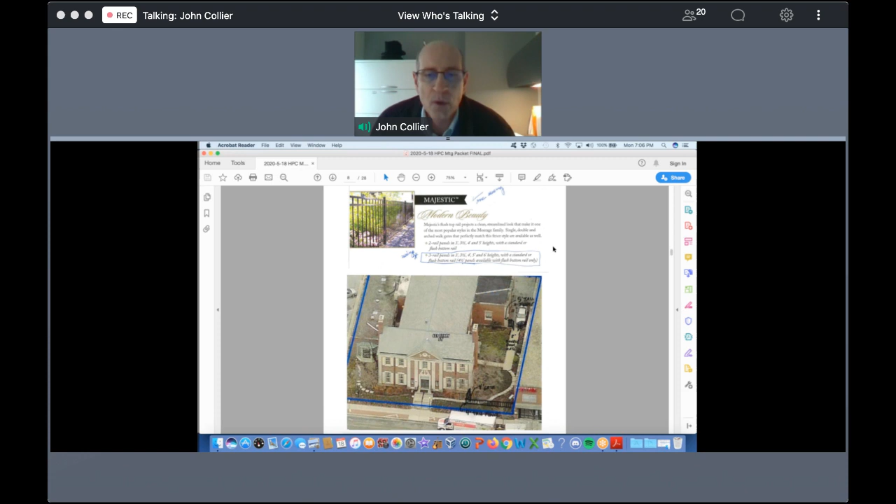And then Andy, if you can scroll down. That's just a street view. And that is it. They're having issues with people cutting through the green space, and it's causing a lot of maintenance problems, so Duncan Hall would like to address this issue. I should mention that the fences do not touch either building. They stop just shy of it.

Thank you, John. I will add that the commission has approved similar types of fences in the past. The color will be black as shown. And the COA committee recommended approval.

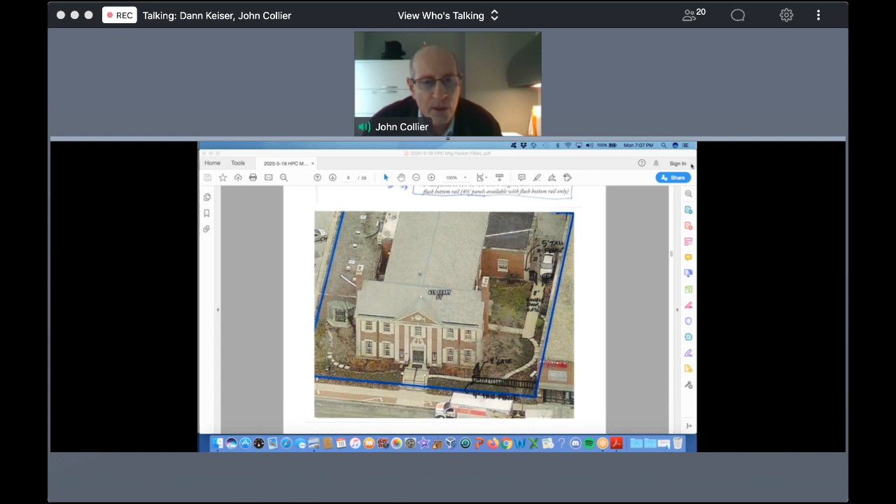Is Dan with us? I'm not sure, are you with us? Yes, I'm here. Okay, can you report on the Ferry Street fence? Yes, I'm here. Again, the black iron look is appropriate and meets the standards. It's appropriate for the district in that it doesn't touch the buildings, it's removable, and doesn't damage the historic fabric. So I think that meets the standards.

Great, thank you. Is there any other discussion amongst the commission members?

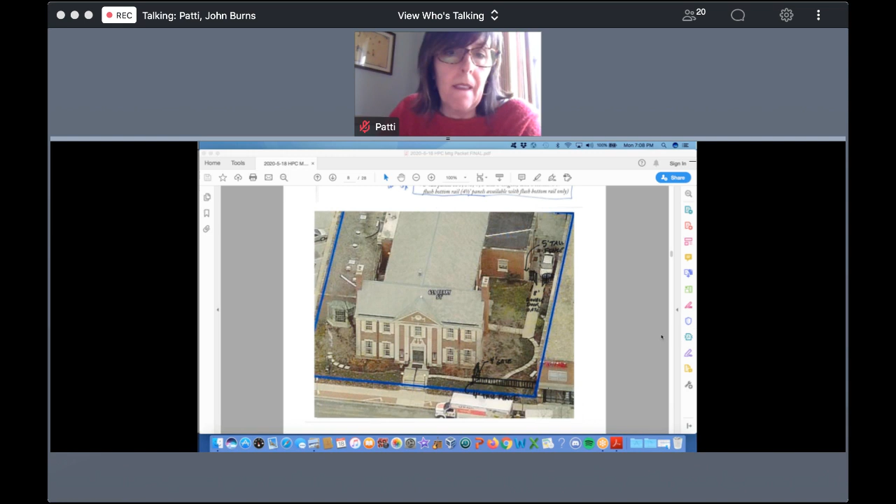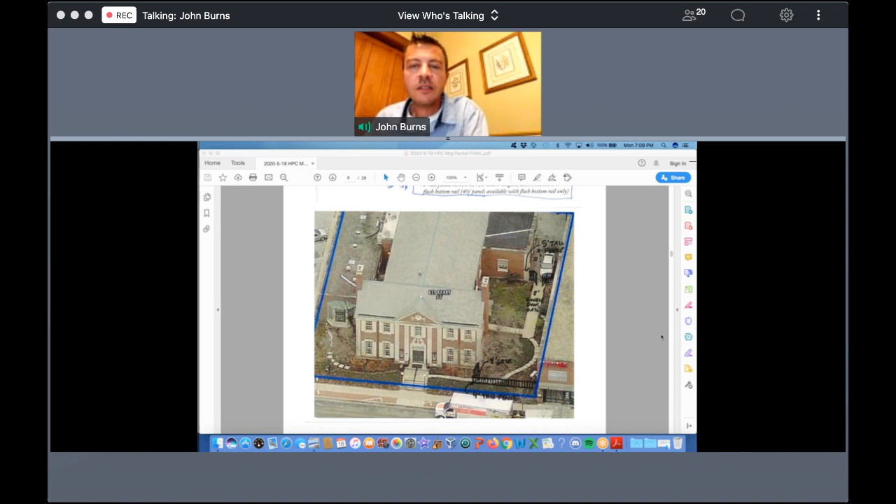And Kurt, if you would like to take us into the second report you have. Okay, this is for 631 Main Street, and it's quite a large project, and I would think at this moment, before I continue with my report, Barry, are you there? Yes, I am. Would you like to give an overview of the project?

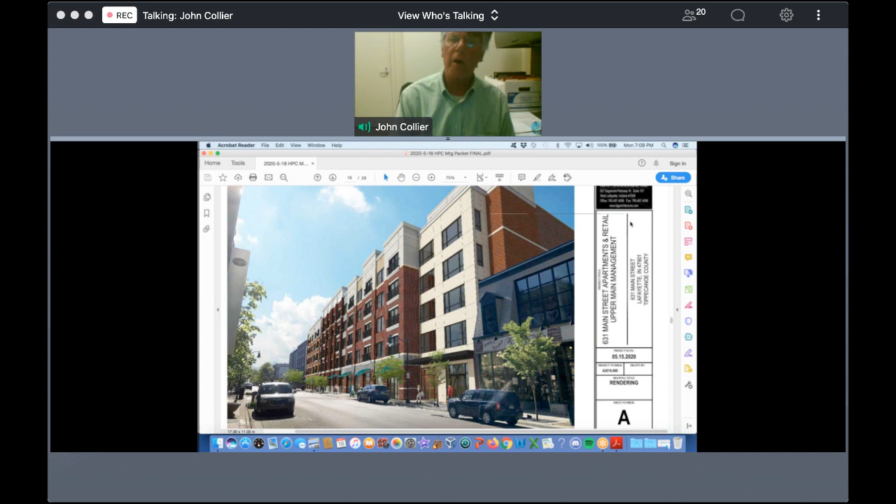Yes, hi, I'm Barry Knechtel with KJG Architects. I am the applicant for our client. And Andy, can you give Barry control if you didn't already? All right, I have pulled up the application. Does everybody see it? Yes. Okay. Yes. Yes. Wonderful.

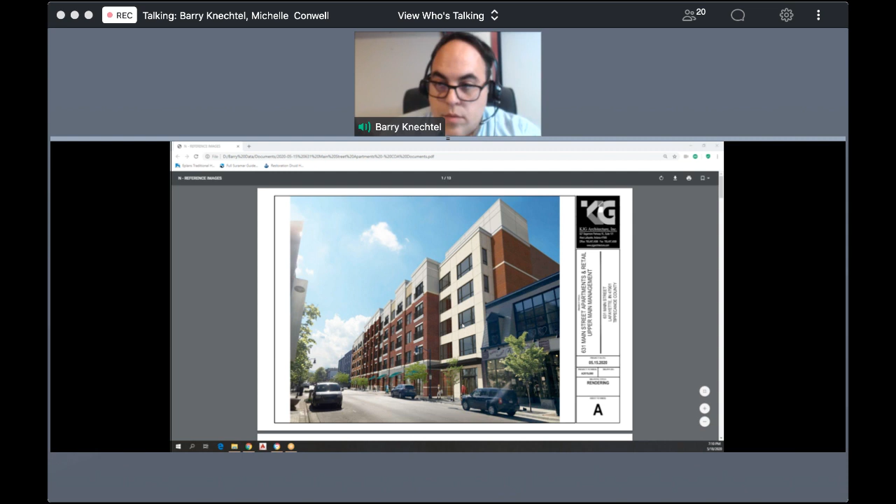The project is a 5-story infill development that will take up the former parking lot between the Frontier Building and Kathy's Candies. The first floor will be a resident entrance and leasable commercial space. Floors 2 through 5 are described as luxury apartments—large units, much larger than you'd find on the other side of the river, geared towards young professionals, people downsizing.

People that want to live in a vibrant downtown community. On the screen you'll see the view from the Lafayette Theater looking across the street at the proposed building. The entrance for residents would be on the west end of the building, with retail continuing east. Then the view from the other end of Main Street looking back downtown, you can see the courthouse in the background and the Frontier building adjacent.

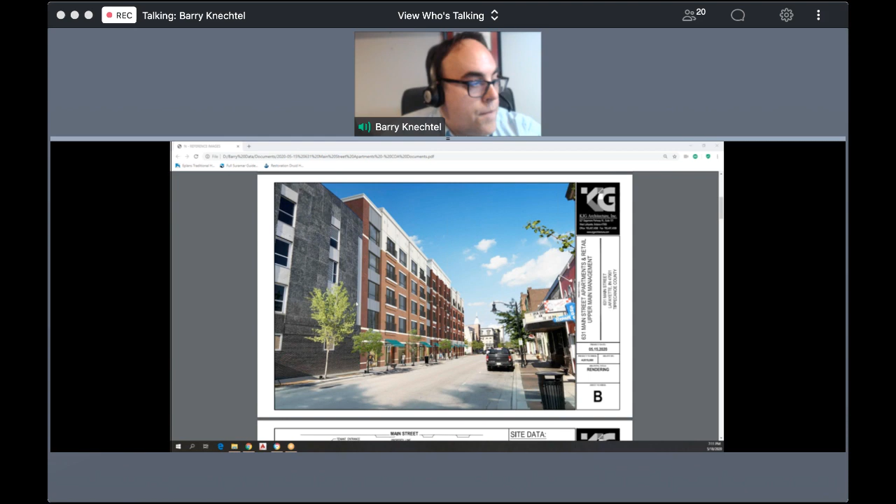On sheet C, this is just a site plan showing the building, how it fronts along Main Street. All of the utilities, parking, and access to the subgrade parking are off of the alley that comes from Columbia Street. We've designed to keep access to the Long Center for the Performing Arts and the rear access to Kathy's Candies. The curved ramp leads into the basement, and then there's on-grade parking.

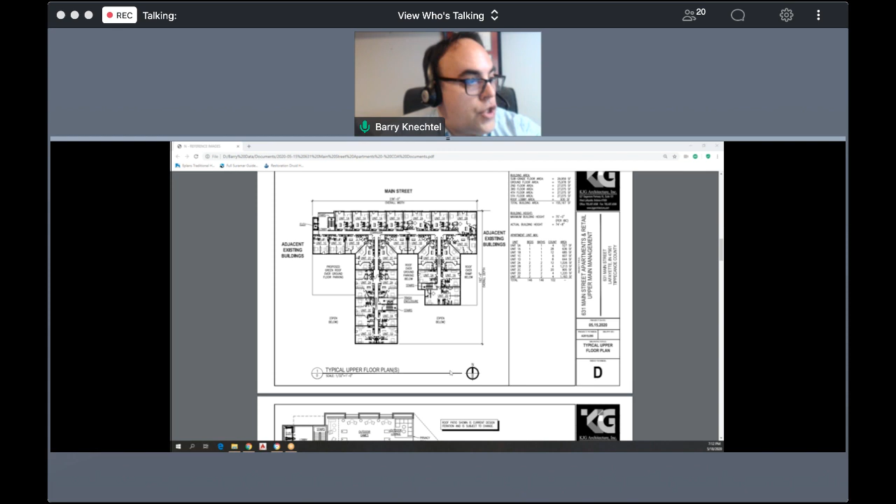Hey Barry, sheet D. Yes. Barry, will you clarify that there's a whole level of parking under that we don't see? Yes, so the curved ramp leads to the subgrade parking, which is a big rectangular box that fills a majority of the site. And I don't think we included that, Andrew, did we?

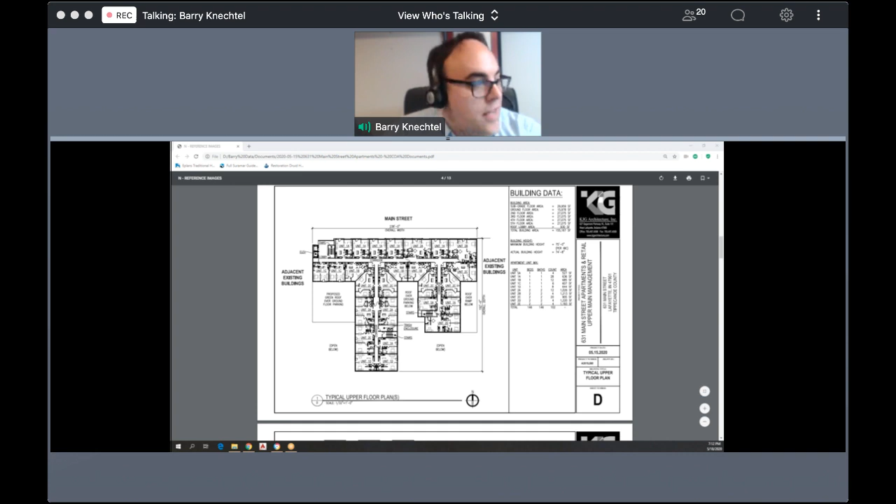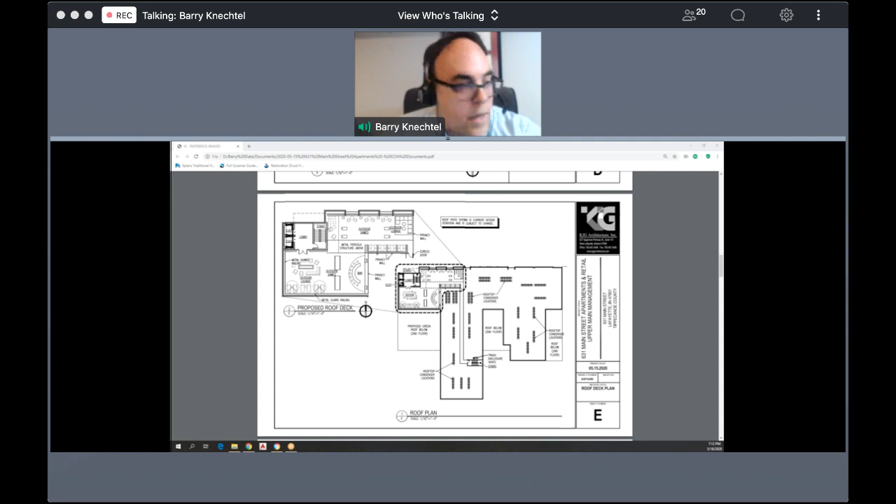Sheet D, this is a typical upper floor layout—it'll show the different apartment configurations. Sheet E highlights the roof patio, so residents will have access to the rooftop where there will be a lounge, some cornhole, and seating for use by the residents. But it didn't show up on the rendering since it's up on the roof. Okay.

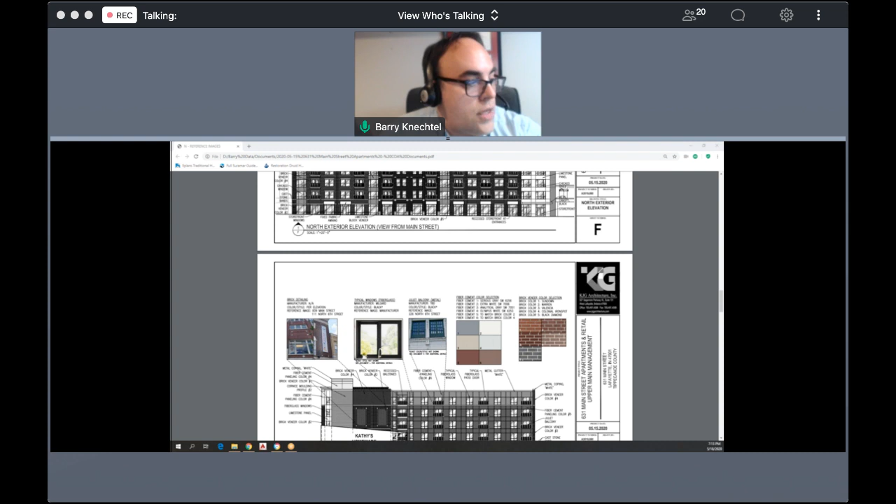Sheet F, there we go. This is the main elevation along Main Street, the north elevation. The goal of the design, instead of it being one large building that took up the whole block, was to subdivide it into some separate, more historic scale buildings.

So the resident entrance has a limestone veneer paneled system. Then we have a combination of masonry and limestone, and at the very top, we use fiber cement panels to mimic stucco or wood paneling. The fiber cement paneling is more durable than wood—it doesn't burn or rot. It's a product more commonly used now instead of wood because of its durability, used sparingly along the top. So this is limestone, but the fiber cement would just be up here.

We've shown some pictures on this sheet of other projects or buildings along Main Street where some of the inspiration was drawn from. You can see the cloth awnings we will use along the ground level. We also have multiple window types—above here is what's commonly called a Chicago style window, found along Main Street, and some double hung windows mimicking the Lafayette Brewing Company across the street. We're also using aluminum storefront, but in a black color to be more historically appropriate.

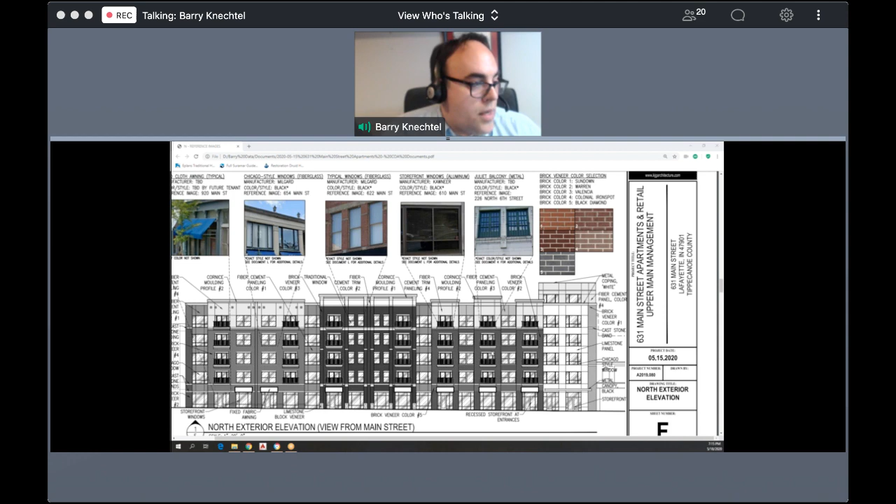Along Main Street we do have Juliet balconies, which can be found downtown, so they do not project out over the right of way. If I zoom in you can see a little more clearly how that would look—there's some lines. Barry, you said North Street, you mean Main Street? Sorry, just want to clarify. Yes, the north elevation along Main Street. Thank you. And some limestone or cast stone detailing at the sill, similar to this building that you can see here on Ferry.

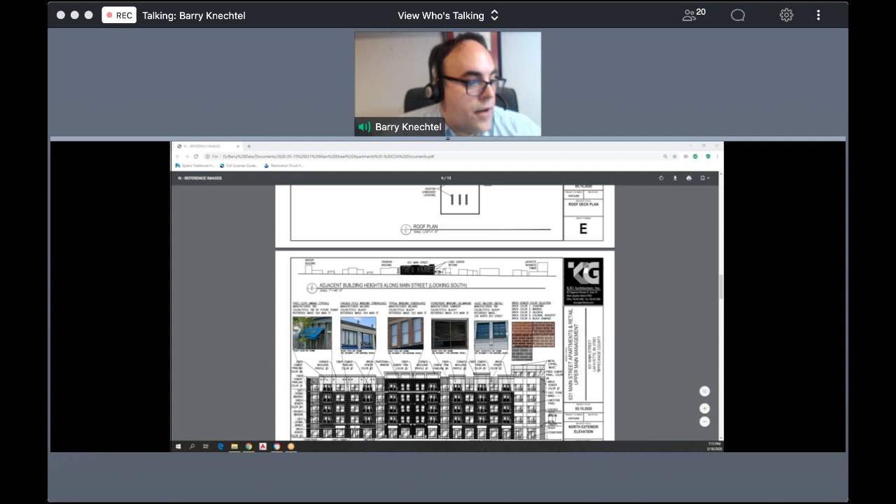There are 5 different brick colors being proposed, and that was done again to give the look of smaller individual buildings. They work harmoniously together, and we tried to stay, for the most part, in the red or brown colorings.

We've picked up some brick detailing that is used at 839 Main Street and at the Long Center as a typical detail. But then the majority of the west elevation that will not be seen very easily from any public road would be fiber cement paneling.

We did choose 2 warm red colors for the back so that when you see it, it would blend into the masonry buildings around it. And the goal of that is just to not call attention to the large facade there.

Some other notes, we did pick the Juliet balconies. The owner does want slider glass doors, but we've selected a French door style, meaning the stiles and the rails are much thicker than your standard residential slider. So we've shown the manufacturer that will be specified in a photograph there.

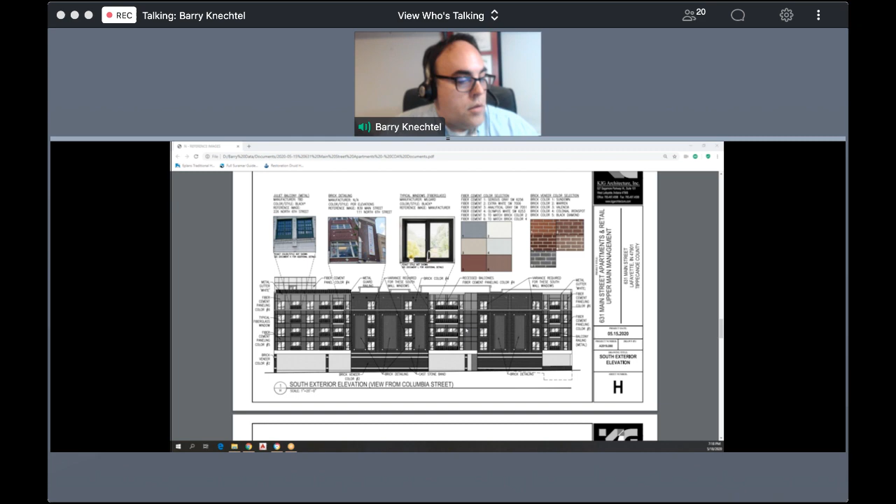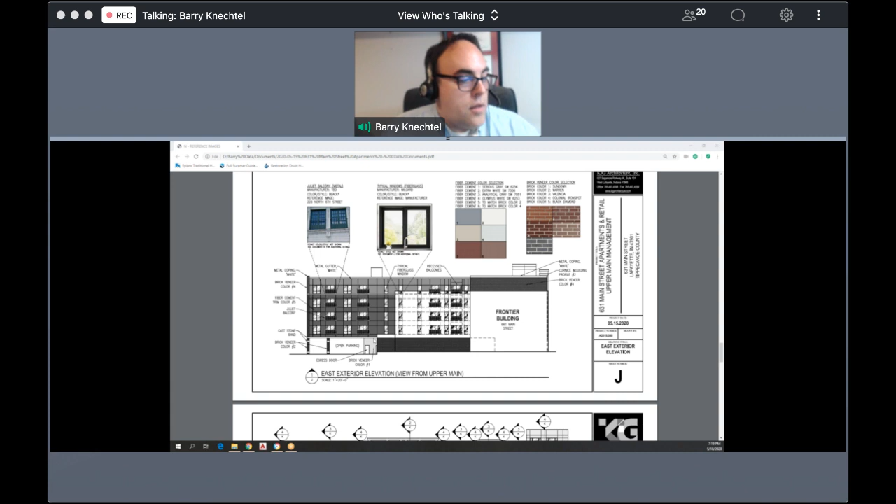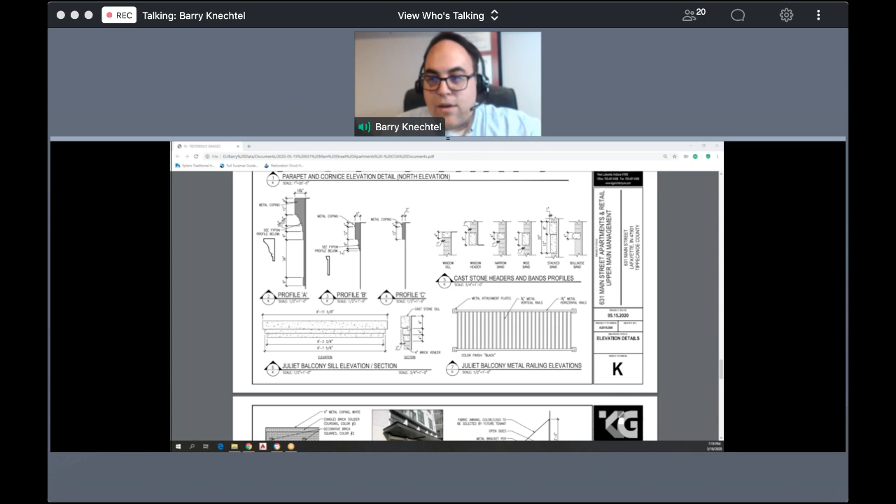At the request of the committee, we've provided details about the cornice work and the limestone paneling just to see the level of detail that would be up at the cornice. We've called out the different Fypon millworks that we intend to use and gave some thickness dimensions so that you can see it would not just be a flat cornice, that there is some architectural detail as well.

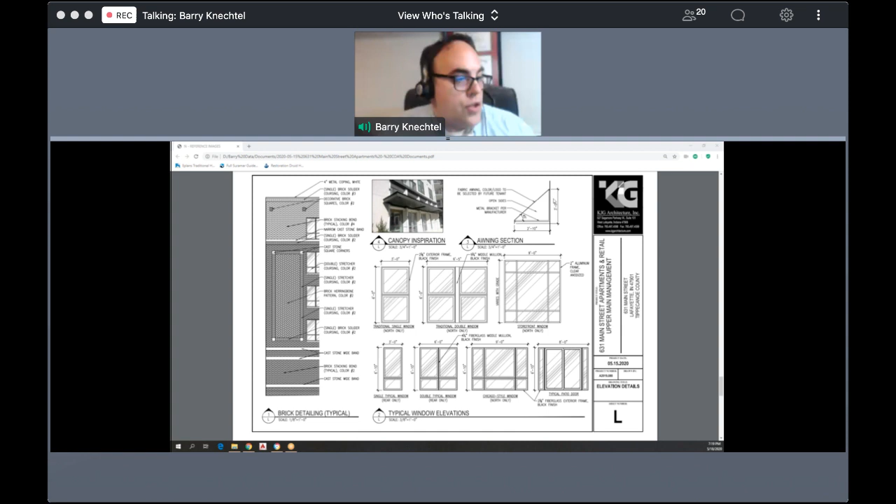Sheet L highlights the different window types that I've discussed, with more detail about the masonry detailing. We do show the resident entrance canopy would be a steel angle that's then cantilevered out, painted black, and just a detail of the awning sizes proposed. And then we do have some pictures of adjacent properties for your reference.

Great, thank you very much, Barry. Very informative. I believe that before I continue here, the mayor would like to make some comments.

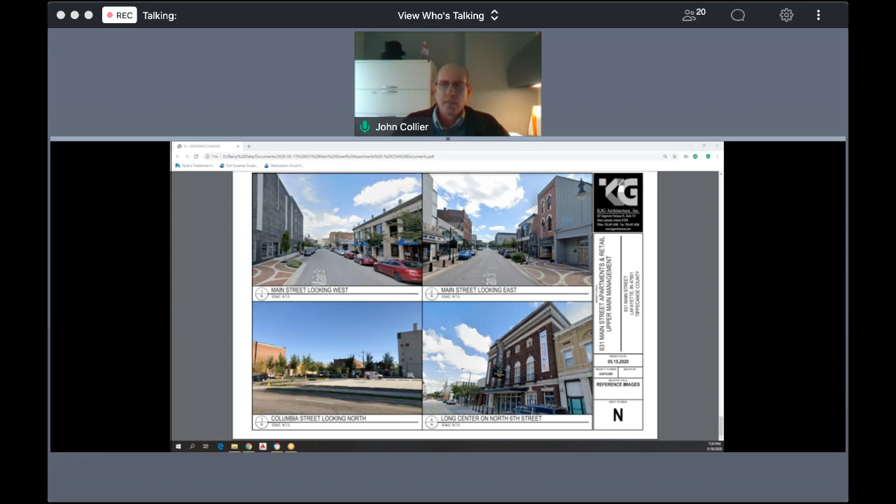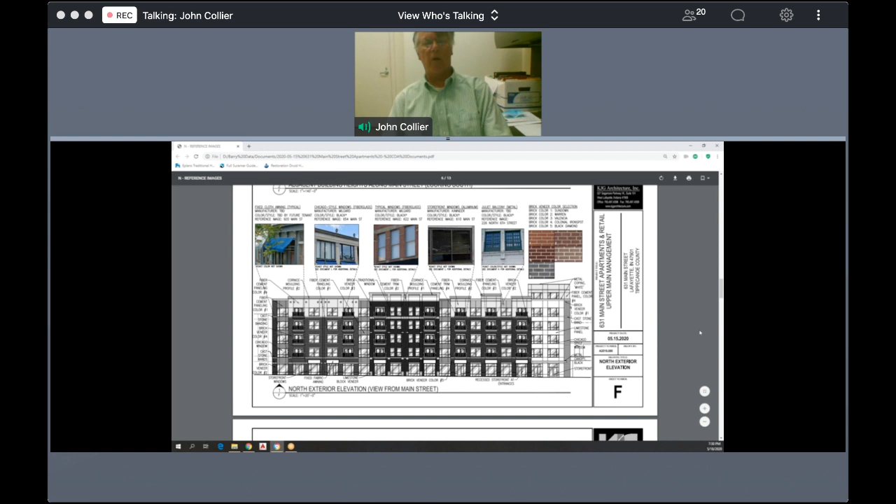Obviously the Kathy's Candies building is 2 stories high, and given the stair tower and the elevator towers and all that, the height of the new proposed building would be 6 stories high there.

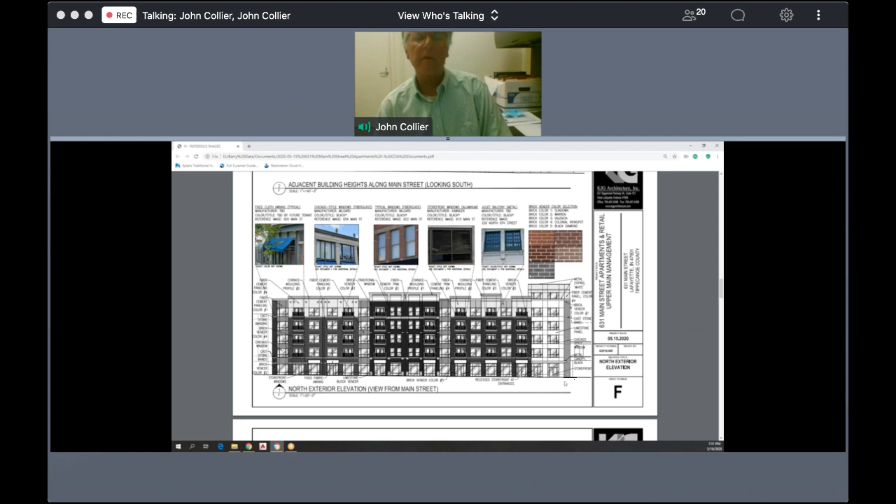Last week, John and I worked with Barry to hopefully come up with a solution to at least make that not look like a 6-story building, but only a 5-story building. And so what Barry has done here is extended the 5-story roof line across and pretty much cut off the view. He's also pushed back the elevator and the stairs so they're not as close to the street as possible here. Barry, can you go to the sketch? I think that'll be more helpful. Yeah, your rendering sketch. There you go.

So as you can see, there is a brick portion that goes up to story number 5, but then above that on story number 6, they went with white cement fiber paneling to hopefully make that portion as invisible as possible from Main Street. Barry, I do have a question though.

Are there going to be windows there? I see on your F drawing you show some windows, but on the drawing we're looking at right now, I do not see any. Maybe they're there but just behind that. Could you clarify? The intent is to have windows into that lobby. They would sit right about here and here, and because of the parapet, they're below it, but they are there.

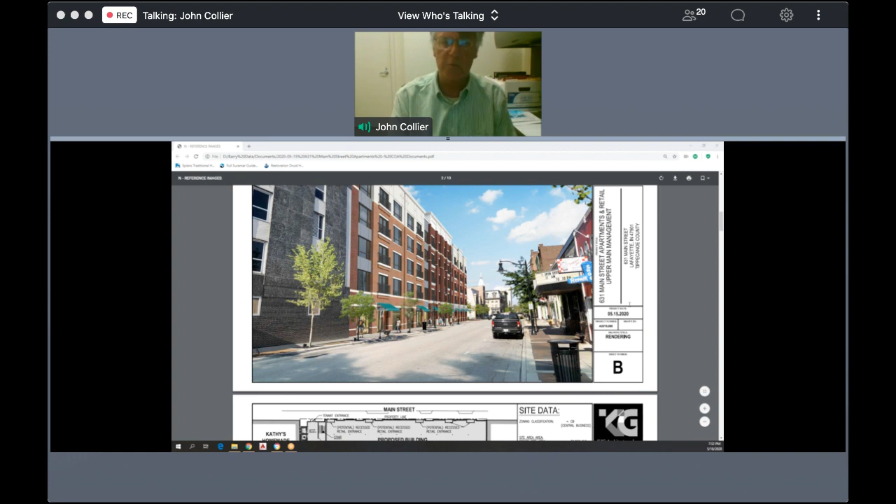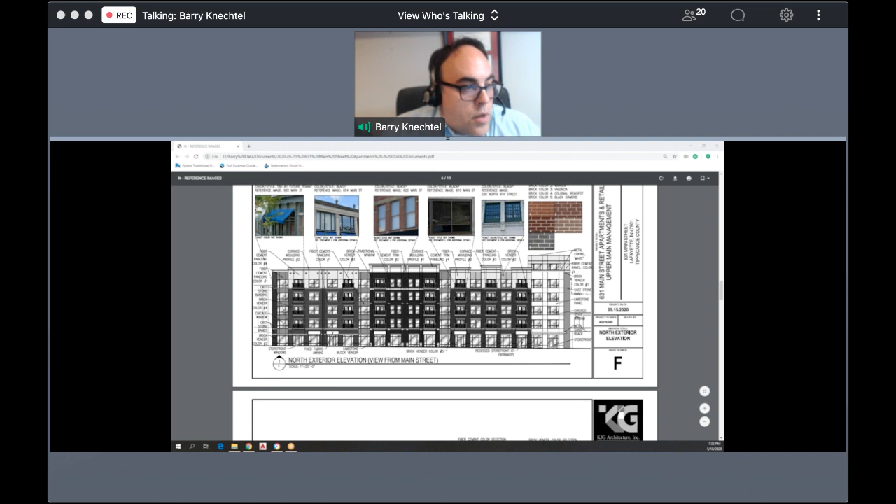Okay, so in your best opinion, they will not be visible from Main Street? Per that, we do show them in elevation F, yes, but you can see in that sketch, I'll zoom back up to B. You can kind of see that corner right there. They just don't show up. Let me scroll back up. So it just misses showing up here.

Yeah Barry, and this part of the building that goes beyond the 5 stories is, like you said, the lobby for the elevator and stairwells and things. It's not additional living space. So the reason you're up further is to accommodate those stairs and elevators, correct? That's correct.

So I think that's a very good solution. In my opinion, it does not appear from Main Street to be a 6-story building abutting a 2-story building. It's only 5, which I believe is appropriate there. My last comment is that, talking with Dan, he was bombarded with a lot of information to process in a limited number of days. I'd like Dan to get the opportunity to look at the details and have whatever questions answered by KJG regarding some of the detailing throughout the building.

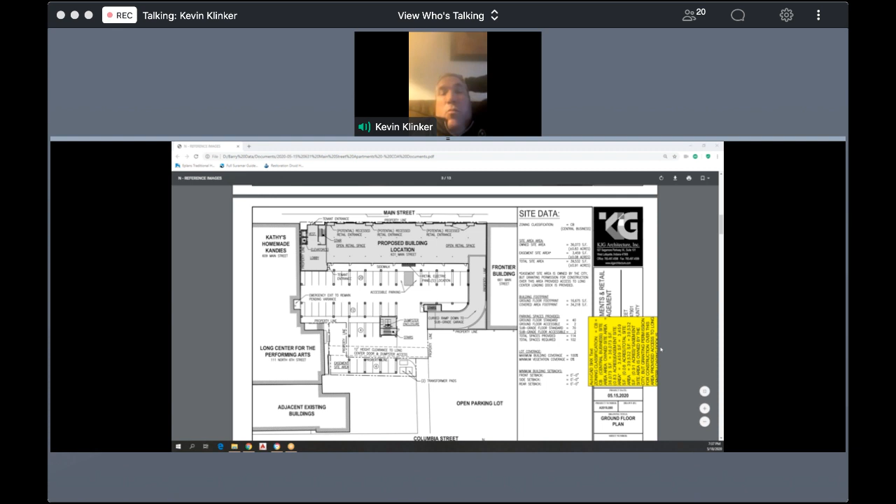Right, so as part of this project, I believe there is an easement, and Andy, correct me if I'm wrong, there is an easement currently that we would maintain access along the south end of this property. The building ends and leaves about 30 feet between the Long Center and the start of our building. So there is vehicular access, 12-foot clearance, which is the standard clearance required for fire trucks and semis. But the last 30 feet, which has dumpsters for the Long Center and some adjacent buildings, would all be completely open with full access.

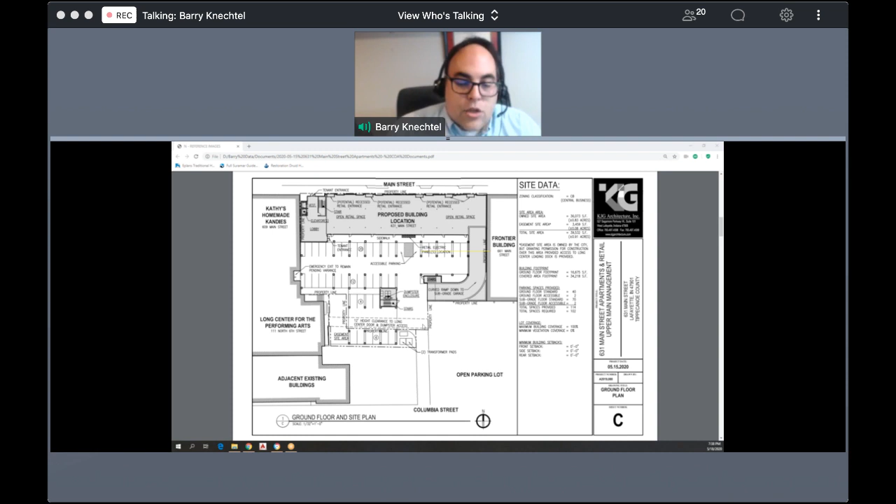And then the drive lane here—we're getting into the weeds a little bit—but there is a very wide turnaround area that was left open for trucks and vans to be able to get in and make the turn to the Long Center. So yes, they would still have full access.

Thanks, Barry. Kevin, as you know, the city of Lafayette owns the Long Center building, and so we're comfortable, and we've been working with them on this to make sure there's appropriate access and that we can get in what we need for the various shows. They've been good to talk to the whole time, and we're comfortable with where we're getting to make sure we have that access.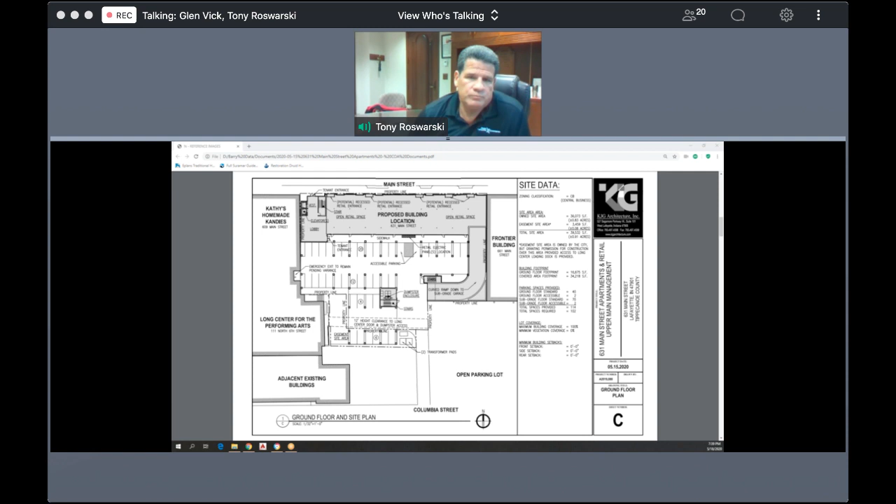That's awesome. Thank you. Barry, this is Glen Vick. I have a question regarding the fiber cement panels. Do you know approximately what percentage of the facade is covered in fiber cement panels? Total on the building or per face? Because as you can see on this elevation, 10% of the north elevation is fiber cement, and obviously that goes up significantly on the other elevations.

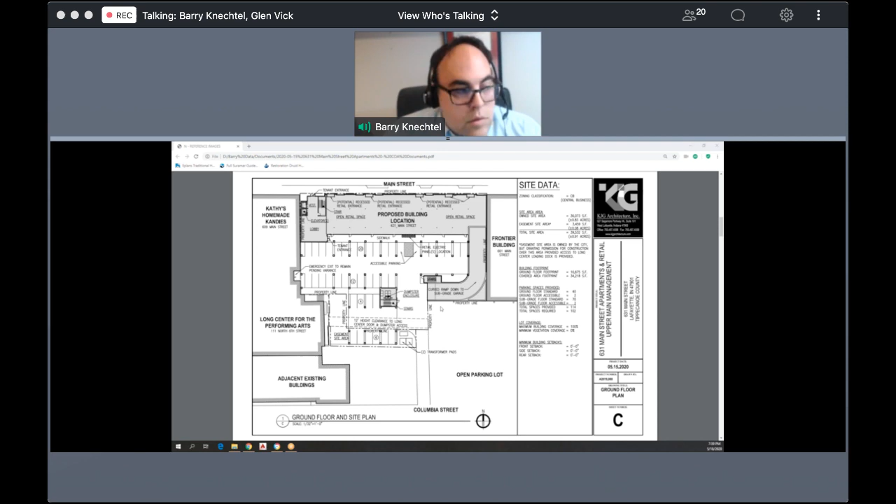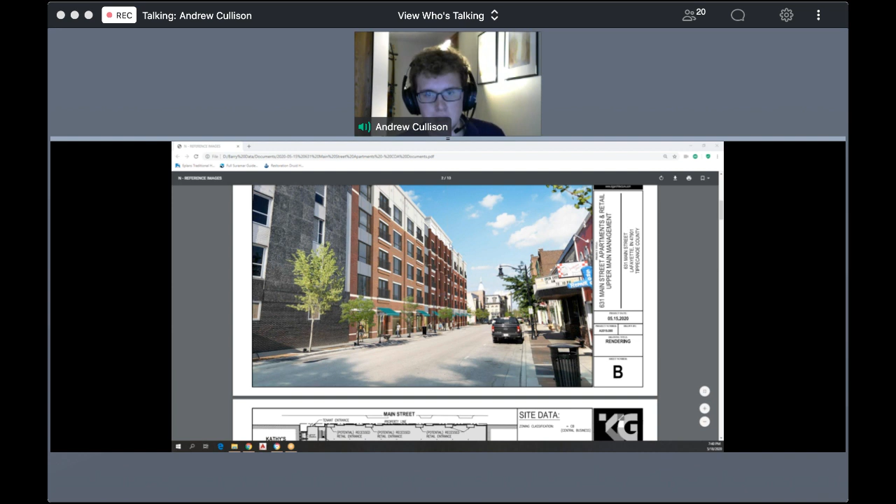I guess most specifically the Main Street side, that elevation or view. Andrew Cullison with KJG is also on the call—yeah, 15% is probably a good guess. We've got the gray paneling you can see on the north elevation, that's kind of the most. And then the top, like fiber cement paneling, the white parts are more meant to mimic wood, like you would see on typical cornice work.

I would like to say we did receive some comments to reduce that amount, but we did add masonry in some of the areas that were originally shown as fiber cement. We did increase the brick amount. Hey Glen, this is Sean. I requested at the COA committee that they add more brick to the Main Street facade, and it looks like they did.

Okay. I assume that's why it's not all brick on the Main Street facing? We did that to intentionally try to reduce the feel of the height of the building. This is a very standard kind of base, middle, and top design, so by switching to fiber cement, we feel it actually brings the scale of the building down a little bit.

How do you think this is going to look in 75 years? Well, given the fact that most of the structures on Main Street are of a masonry nature—brick or limestone—fiber cement paneling has a 50-year warranty on it, so it's one of the longer warranties from non-masonry products. With good maintenance and a repaint, it should hold up. That's 50 years, so it'll need some touch up. But brick needs tuck pointing and maintenance as well—it doesn't last forever if it's left alone.

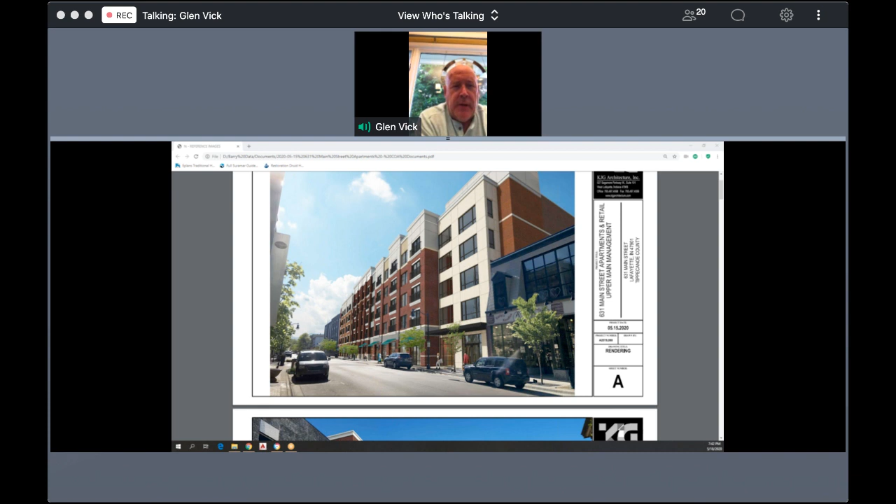And you could accomplish that with a different color of brick? I'm sorry, I'll repeat—you could not have accomplished that with a different color of brick? It could be accomplished, it would be a different look though, because of the panel lines and the trim and cornice work that we were provided. Obviously couldn't do that with masonry. Okay, thank you.

Okay, any other commission members? Sean Lutz here—I don't have any particular issue with the height because the facade is broken up, and there are changes compared to how it looked when it was first brought to the Certificate of Appropriateness Committee. Another change that was stated earlier was switching from the silver aluminum on the storefronts to a darker tone. Barry, correct me if I'm wrong, there won't be any silver aluminum on the Main Street facade at this point? That's correct—both the aluminum storefront and the upper windows would all be black.

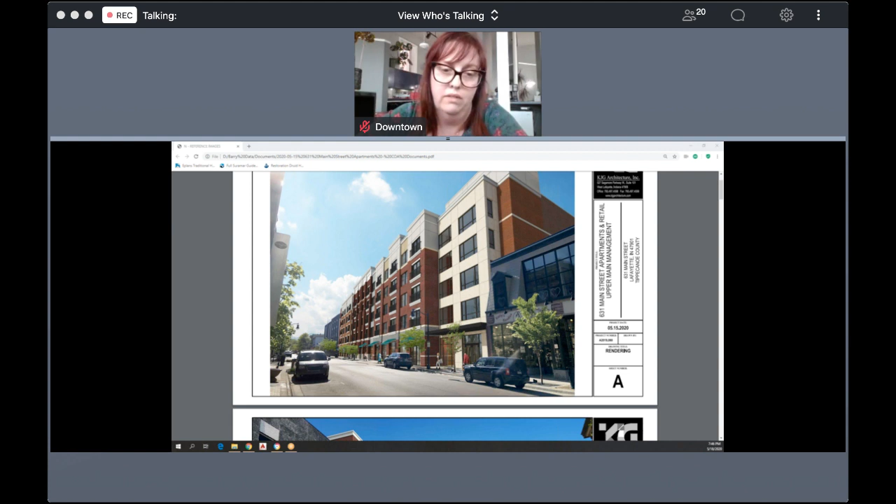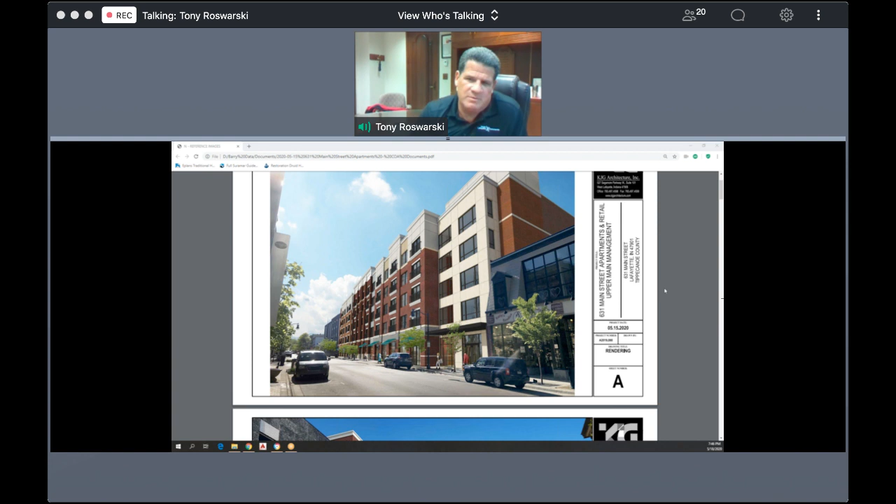Well, I will agree with you, Sean, that I would like to see some more brick on that as well. Can you guys clarify that? Why do you think the limestone doesn't fit when we have buildings throughout downtown that have limestone on them? And what's the courthouse made out of? Correct, the courthouse is all limestone, but to me it's architecturally different than just a flat slab.

Those buildings you're showing me have some details to them, and I just feel like what I'm looking at right now—I like the detail of the different facades we're trying to get to, but I also think the modern materials don't necessarily fit the appropriate look. I just feel like that's a material you could build a hospital out of. Not to be offensive, but I think our downtown Main Street needs a bit more architectural difference than some of the details I'm seeing. Not all—I appreciate a lot of what's being done here, but in my opinion some of it could be done a little differently to look more age appropriate.

I'll add, if you don't mind, some of the direction given along the way, which Kurt pointed out too: the area where the entrance is for the residents was being recessed so it wouldn't be as conspicuous on the Main Street side, giving more prominence to the rest of the building. The fiber cement was meant to fade out a little, lessening the height and massing. That's why we didn't want to draw the eye with the limestone and fiber cement colors—it's more drawn instead to, as Sean pointed out, the brick areas, which are more in keeping with the other buildings and typical styles downtown. So part of that was direction they've been given over the past several weeks.

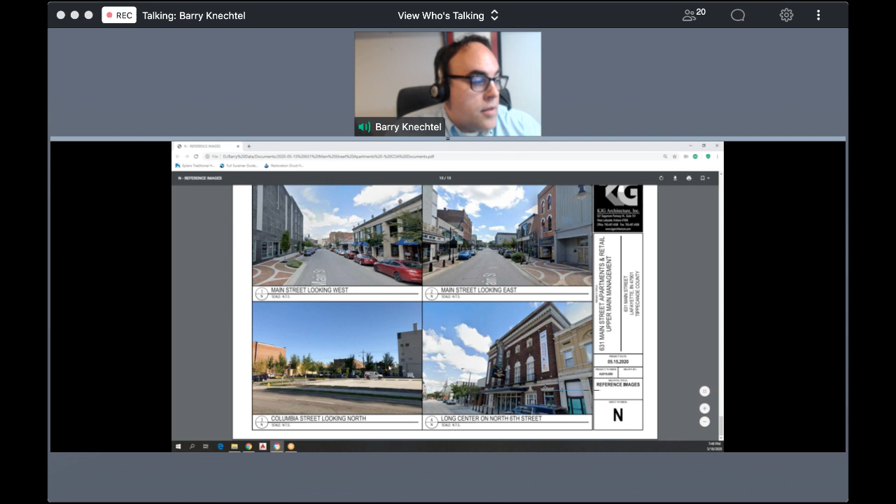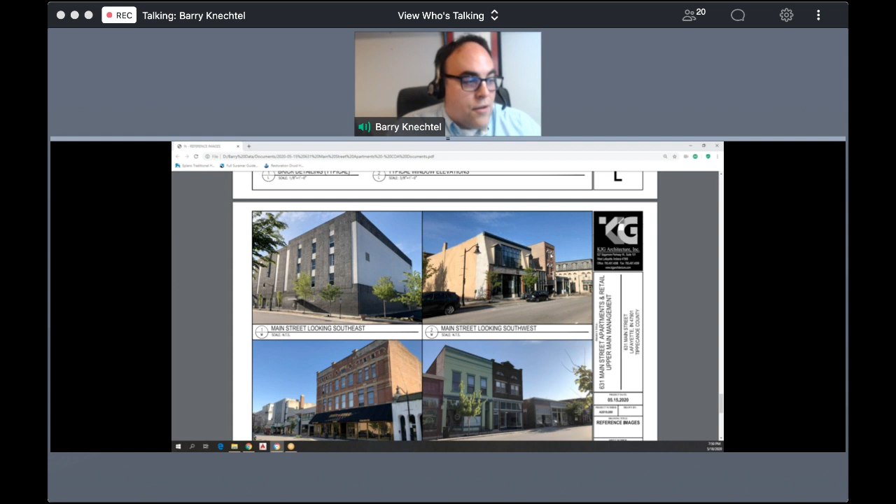And maybe we did try to bite off more than we could chew. We tried to respond to this very eclectic block of Main Street—there are so many design types. Obviously we didn't want to match the Frontier building, but if you look up and down Main Street there are different colors and different materials. It's very difficult; if this block had a more homogeneous style it would have been much easier, but there are many height changes. Right next to our building there are unique shapes, structures, and materials—you can see limestone, glazed brick, stucco. It's a very eclectic block for sure.

Barry, it should be said that just around the corner you used to have the old YMCA and the Columbia Flats, which were about five stories each.

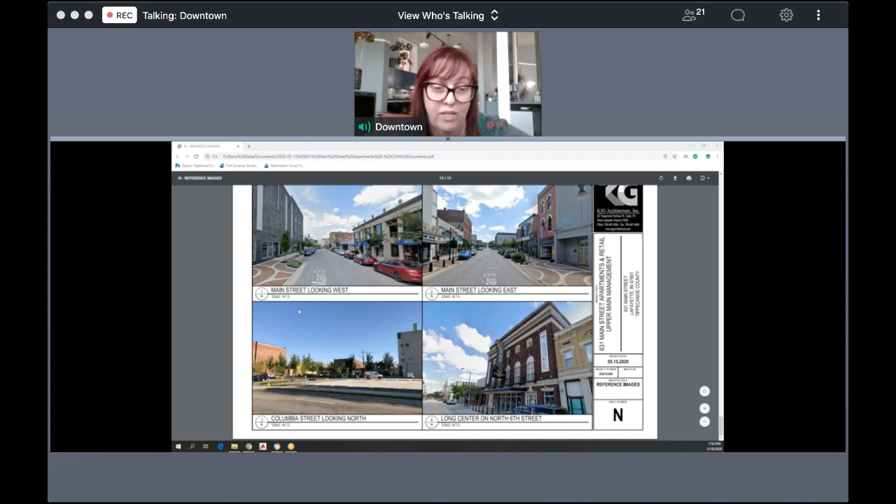I'm all for the growth of downtown. I love downtown, I live downtown, I'm here all the time. But I think what our community wants, as we walk down our downtown, sometimes you don't know what year a building was built. There are new buildings downtown you can't tell were built in the 90s - there are architectural details that make it stand out like it's old, and it's not. So I think as a community that's what we want to see: those details, something that stands out a little different. Yes, it's built now, but you can add some old details to make it look old.

This looks like a new building, most of it to me. Like I said, the darker brick in the middle looks like an old building next to the right side of it. I think as a community we want to see infill that looks like our old buildings, where we can't tell the difference. But that's just my personal opinion, and I'm speaking for myself.

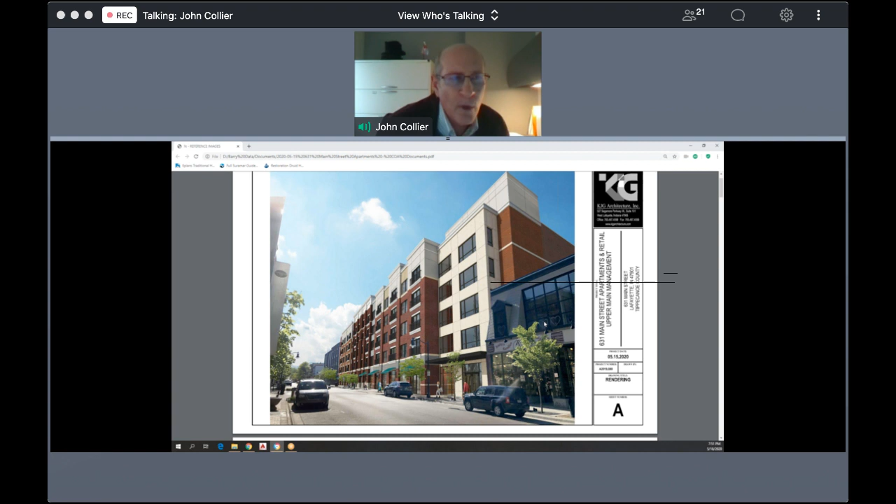Hey Kurt or Dann, maybe one of you could talk about the National Trust or the standards - I think even with the Secretary of Interior, they don't want new buildings to mimic the old ones. You're not supposed to make them look like they were built back in the 1800s. Is that correct?

Yes, they're supposed to be distinguishably different so you can tell, but the scaling, massing, and materials are supposed to be similar. Sean, I've asked the same questions, and I don't know that we're at that level of detail, but if this is a flush limestone block wall like you'd see in some modern downtowns, the bevels where the blocks come together - how it's jointed, how it's detailed - can break up that mass, or it can make it look like a big stucco wall.

So I've been asking for those details too, and we need to verify some of those details or encourage them to break up the detail, because the other limestone buildings downtown, whether it's the courthouse or whatever, you can see the individual stones. It's not just a big limestone mass, and the stones or panels aren't real large. So we don't want real large panels - more individual stones or some detail that breaks that up would be preferred.

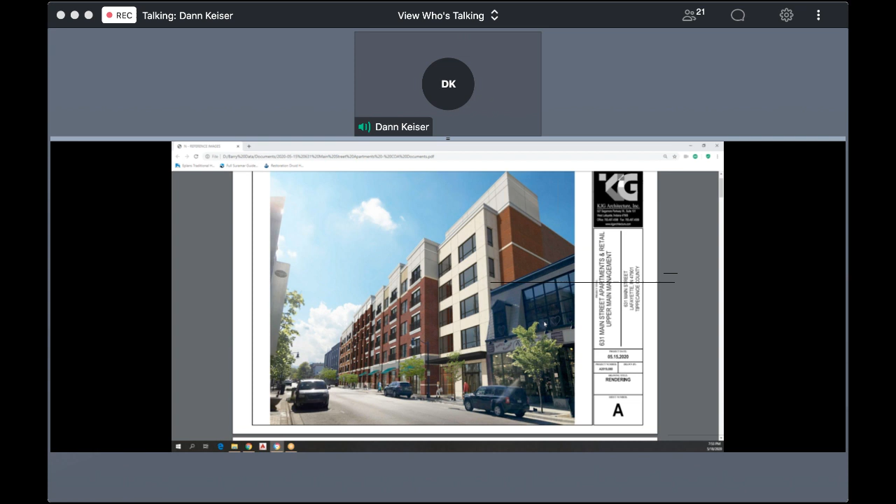And I agree with Dann there. I think that limestone portion can be designed to fit in. I think, Shauna, it's that fiber cement board up on the 5th story that may be bothering you, because it was discussed quite a bit, and if that can be changed over to less of the fiber cement, at least on the north elevation, I think that would get a lot closer to fitting your vision.

And meeting the recommendations. It's Amy - if I'm correct, is there a change of color across the fiber cement at the top, and was that presumably a change made as a result of the COA discussion? It was not specifically discussed, but the 3 colors chosen for the fiber cement were done to mimic the 3 main colors of limestone - you can get a white, a buff, and a gray. So that's why those 3 colors were chosen.

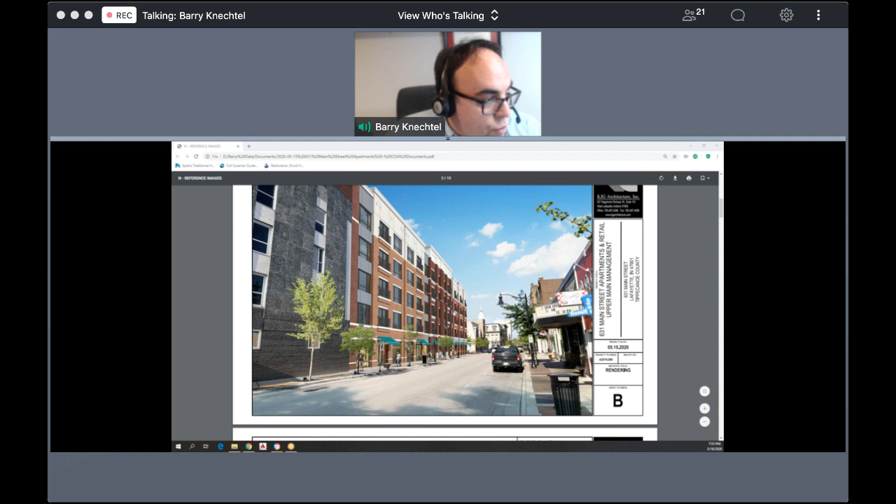Yes, located in 3 locations. Anybody else from the commission have any other discussions or questions? Well, I'm thinking what you were just talking about there, John, probably could easily be changed to a gray brick. I don't mind the color one bit - I think it does do good differentiating the different facade designs, but I think that could easily be changed to a brick. I would agree, the color does set apart the different materials it surrounds nicely, so I do like that.

Barry, could you talk about any possibility of at least the three bottom bands, not at the parapet, maybe being a similar color, but instead be the brick veneer?

I haven't discussed that with my client, but it can happen architecturally. That may be quite helpful, I think, in kind of satisfying some of the things I've been hearing. I think it probably would look pretty good, so I think it would be a good idea to see if that's something you guys can make work.

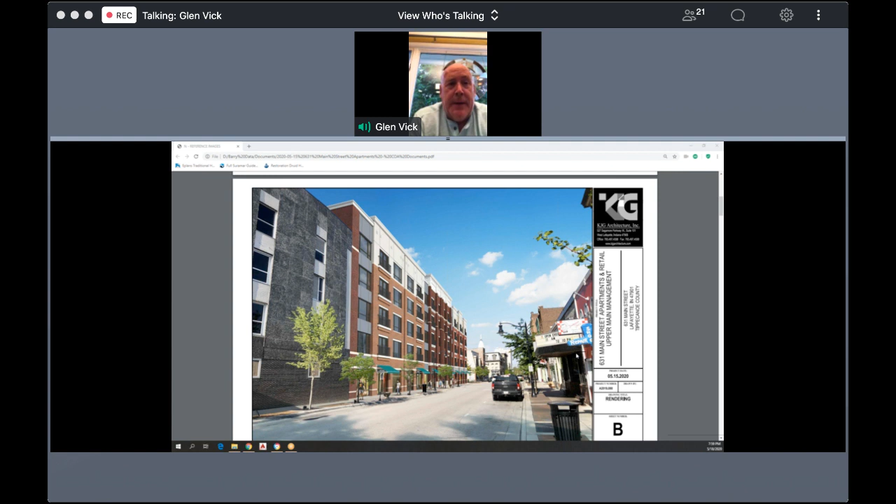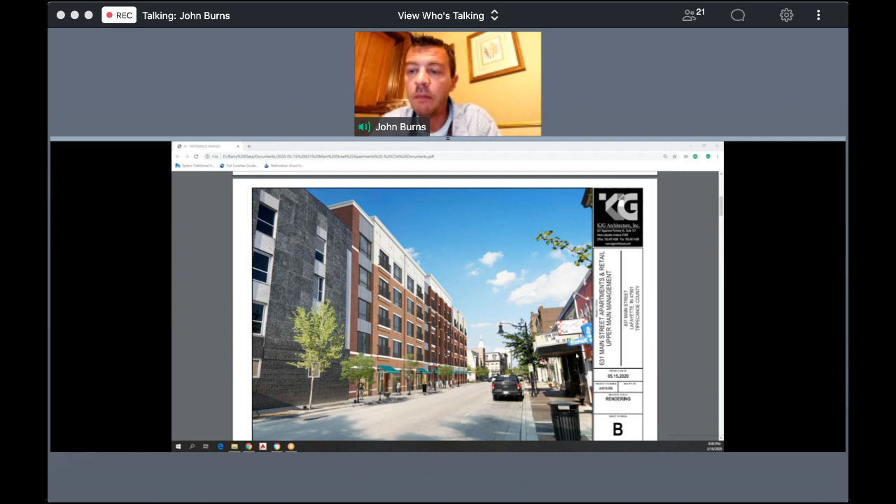If I could bring a few other things up that have nothing to do with building material. Just a quick question, I think I know the answer to this one. We obviously have a very nice sidewalk and streetscape along this portion of Main Street. The way this building relates to that, are there any changes at all contemplated, or is it just going to blend seamlessly?

Well, John, there's the other question I had. Currently there's a driveway into the parking lot, in and out. We're not planning to keep that, so we'll put it back the way the rest of the streetscape is, but we'll take out the driveway.

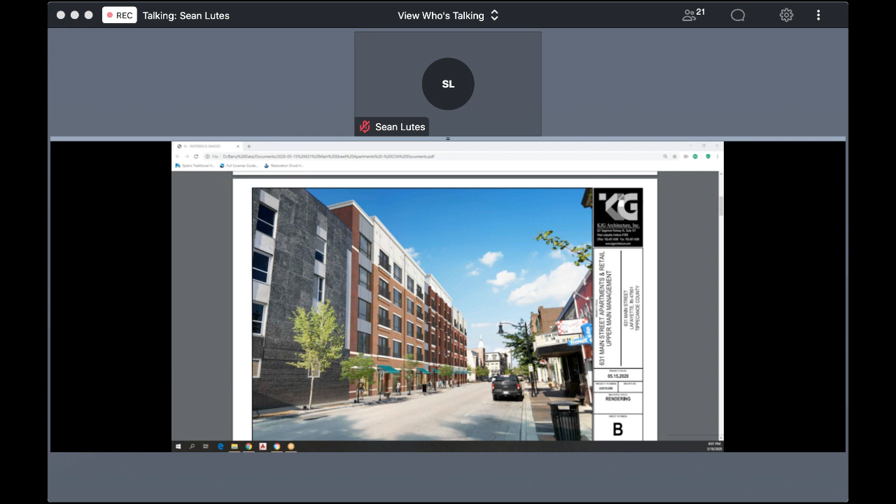Very good. I would also like to add, we really don't like trees in front of the entryways to the businesses. If they could be adjusted once you know exactly where the entrances are. Wouldn't that be something though that the city would do? Yes, if that'll keep things moving, we'll be happy to adjust the location of the trees if that's something the commission is interested in.

Very good. The other question I wanted to ask - I didn't see anything about this - but as far as lighting, what type of lighting is going to be installed to help celebrate this building? We've got a huge opportunity here. I assume that we'll have some exterior lighting in places.

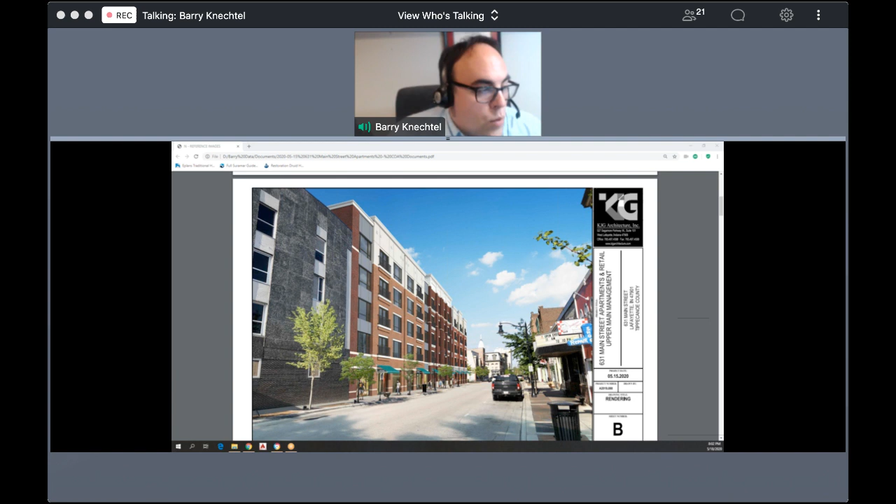That has not been discussed as of yet, but we assume there will be lighting along the street to make sure that that block is adequately lit.

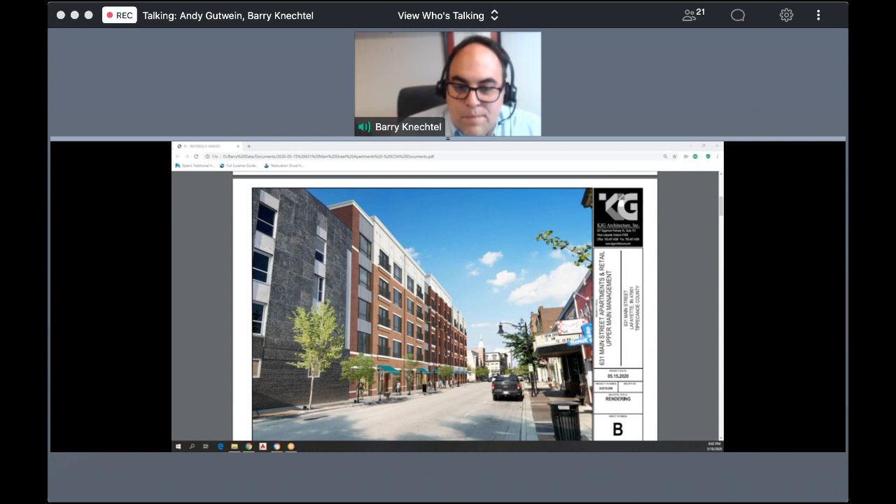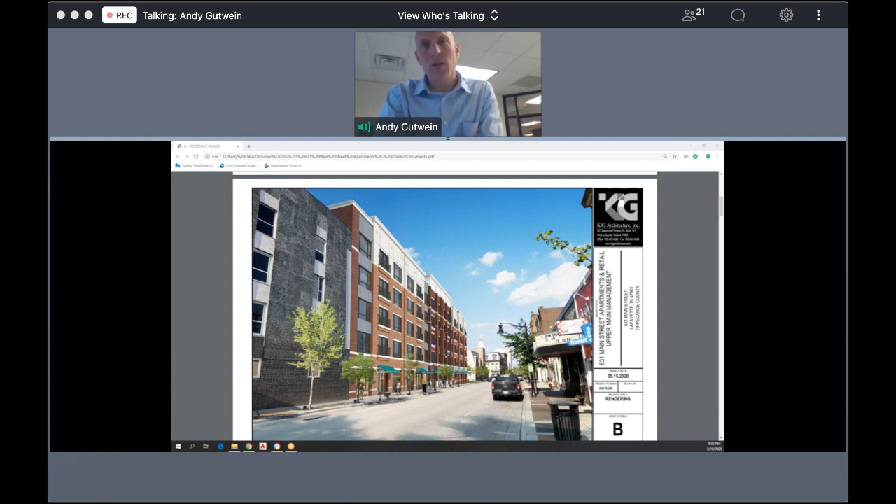Andy, did you have any visions of any additional architectural lighting? I agree with John that it's a great opportunity, a great chance. I think that to the extent we could get some lighting on there that would highlight the building without being obnoxious or disturbing anybody in the area, including the residents and neighbors, that'd be great. But you're correct, Barry, we just haven't given consideration to that at this point. I think that's just fine. We can certainly move forward with that being handled at a different time.

So I just wanted to clarify. All

Is there anything else from any of the other commission members? Okay, not having heard anything, I think this might be the opportunity where we open it up for public comment.

John? Sure. So we did receive several emails from folks, as you may recall, based on Governor Holcomb's requirements for how public meetings should be held during the COVID-19 crisis. This format is acceptable as long as we do roll call votes and as long as we give the public an opportunity to respond in advance of the meeting, which they did. They could respond until 6 o'clock this evening, and no one responded after that anyway that I saw.

I will tell you that typically the only time there is an opportunity for folks to participate on the public side is if there is a public hearing. And this is not a public hearing. This is a standard Historic Preservation Commission meeting. So we do meet the governor's requirements for a public meeting, just to clarify.

So I received probably 10 or 12 comments, and I'll put each of them into the record. So please bear with me, and we will make them a part of the record as well.

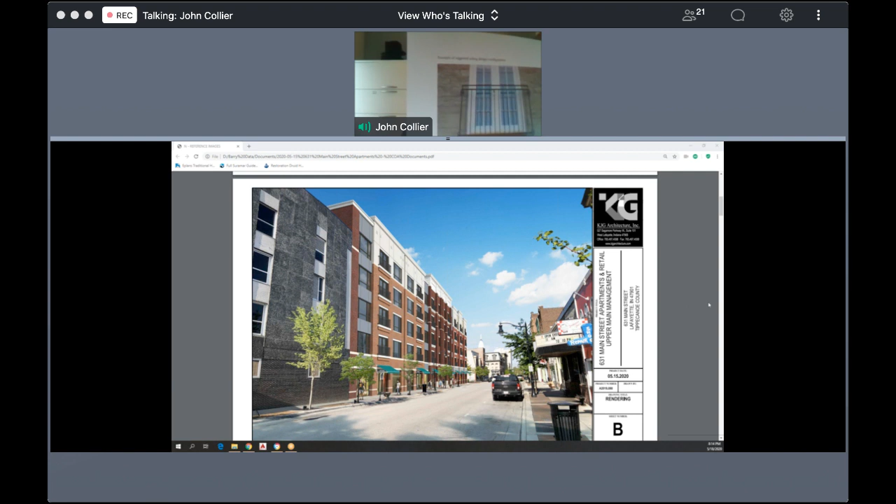He also attached an image of a Juliet balcony with a horizontal component that you can see at the top of the rail, as an example, not necessarily suggesting that should be it.

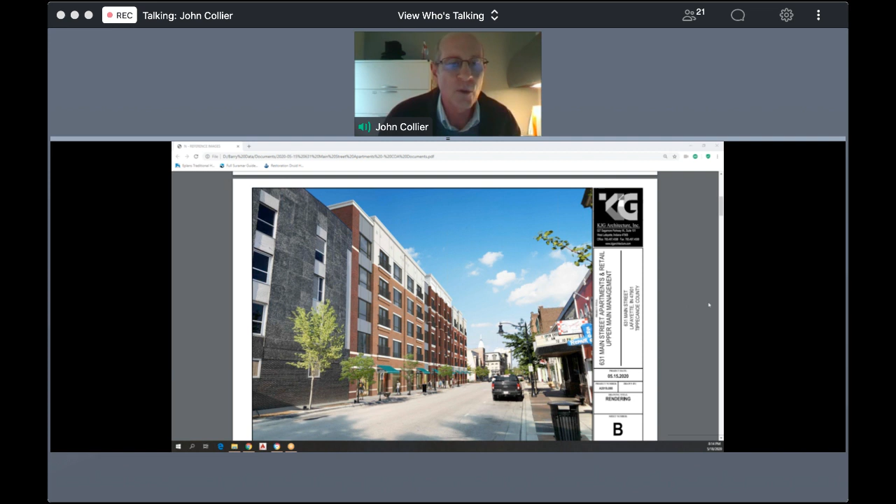I received an email from Andrew DeSutter. He says, hi, I read the J&C article that this new development will have 3 retail commercial spaces on the street level. Who determines what businesses will go in there? Will there be any kind of selection process, or is it merely first come, first serve?

Again, this is completely out of the purview of the Historic Preservation Commission, and it's totally up to the developers to work with that.

Finally, we received an email from Quentin Robinson. He's a Tippecanoe County historian. He says, greetings friends, as the Tippecanoe County historian, I would like to present some views concerning the proposed development in the 600 block of Main Street for your consideration.

First, let me be clear, I'm excited and encouraged to know that someone wants to develop that surface parking lot into something more useful. That being said, my first impression of the project was not a positive one. That opinion was based only on the 2 renderings that I saw. Later, I read the entire packet of information and I realized some of my initial thoughts were unfounded.

I am happy that there was an attempt to present the building as 4 different buildings. I was happy to see that illusion was increased by the use of different brick colors and patterns. That said, I don't believe the present renderings achieve the goal expressed in the project description, to emulate 4 separate facades, to give the building more appropriate scale and sense of vertical orientation rather than one long building. The current rendering looks just like the half dozen or so other new and recent developments we see around downtown and across the river in West Lafayette.

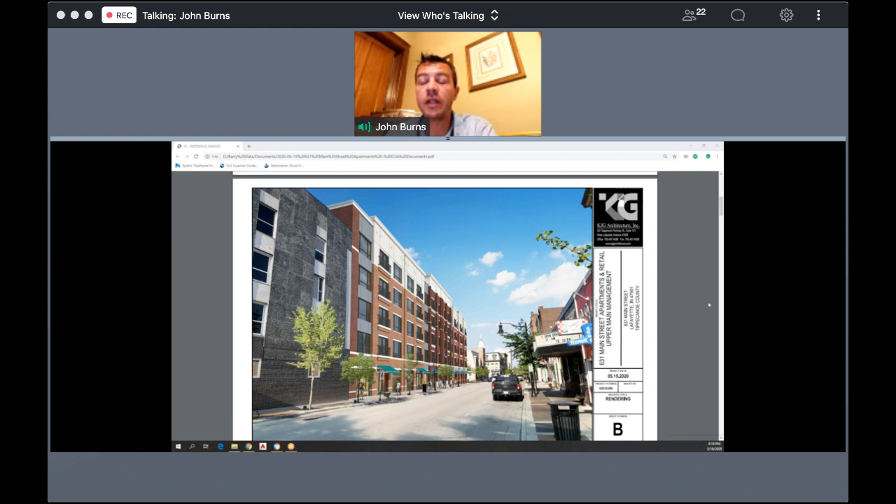Well, at this point, it sounds like we may be at a point where we might be ready to make a motion with an amendment based on the last discussion we had with Barry and Andy about replacing the fiber cement with the brick veneer between the 2nd, 3rd, 4th floors. Anybody like to make a motion?

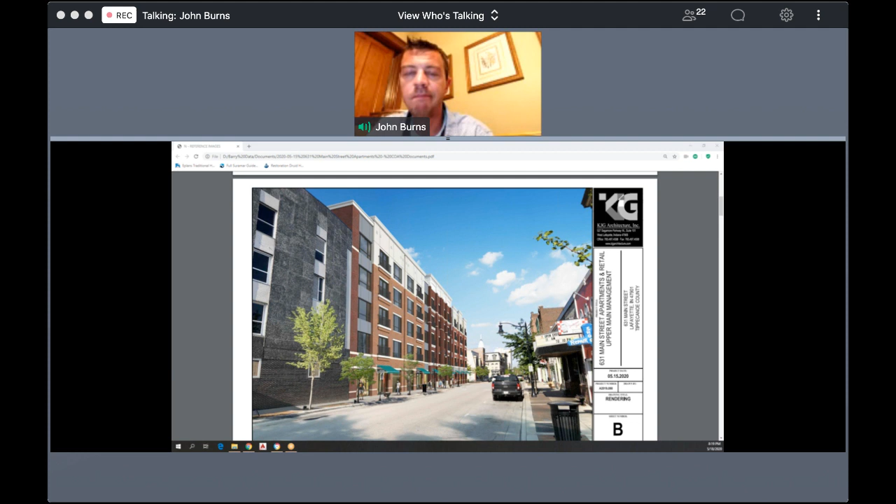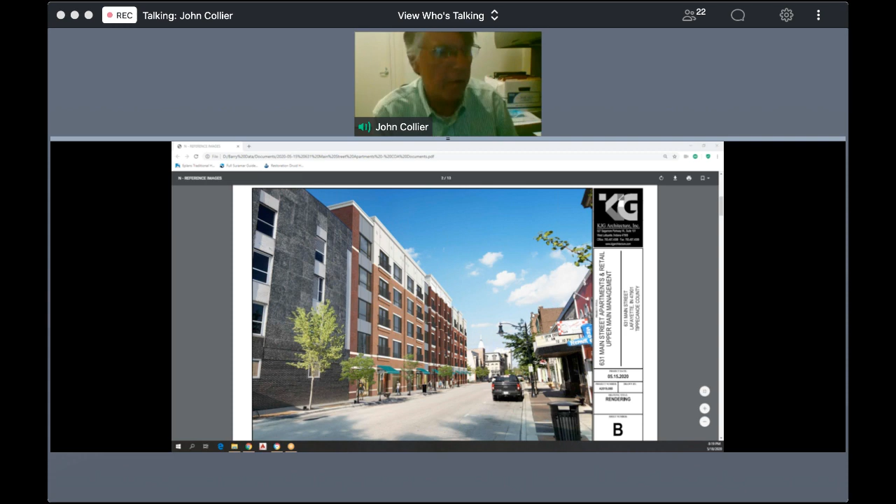John, if I can also add a couple other things. Yes. To have the applicant report back to us as soon as they know the results of their state variance hearing, and to give Dan more time to look at the details if he so desires.

Very good. Barry, you'll be sure to keep us in the loop. Yes, would that be via email or just technically what process you want me to use to report back?

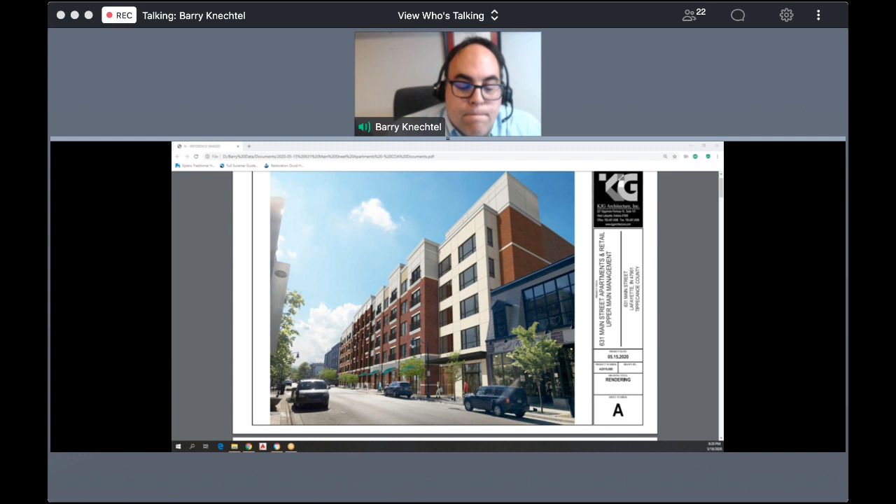Kurt, John, up to you. Typically, I mean, I'm sorry, John, were you going to say something? Up to you, John. I was just going to say, you can approve it with conditions and give the historic preservation officer the option to review without having to bring it back to the full commission. That's typically what we've done with other projects like this.

Okay, so with regard to the state variance for the window openings, we will handle it that way. Perfect. Yes, we can report back.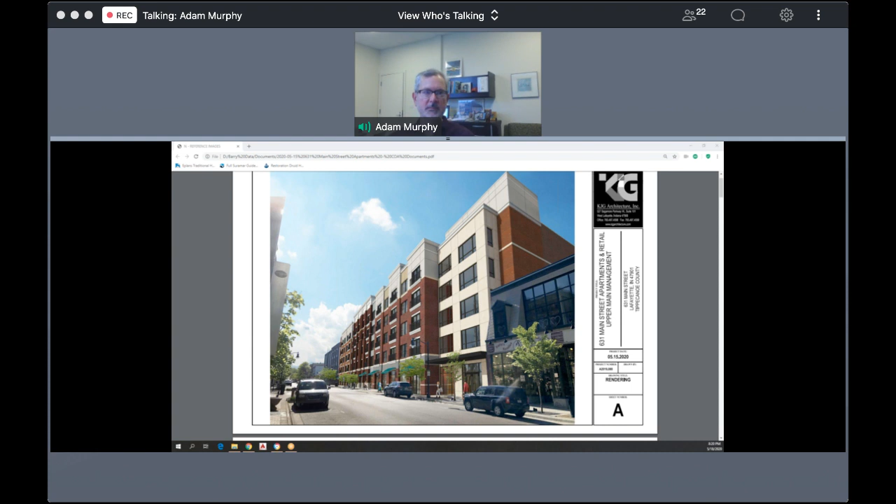Yeah, Barry, I would just clarify that all comments should go to John Collier, and he can then relay those to Dan and others that are appropriate. But John Collier should be the single point of contact. Yes, thank you, Dennis.

All right, commissioners, anybody like to make a motion?

Well, I suppose I can make a motion, can I? Yeah, I would appreciate if somebody would. I mean, I think...

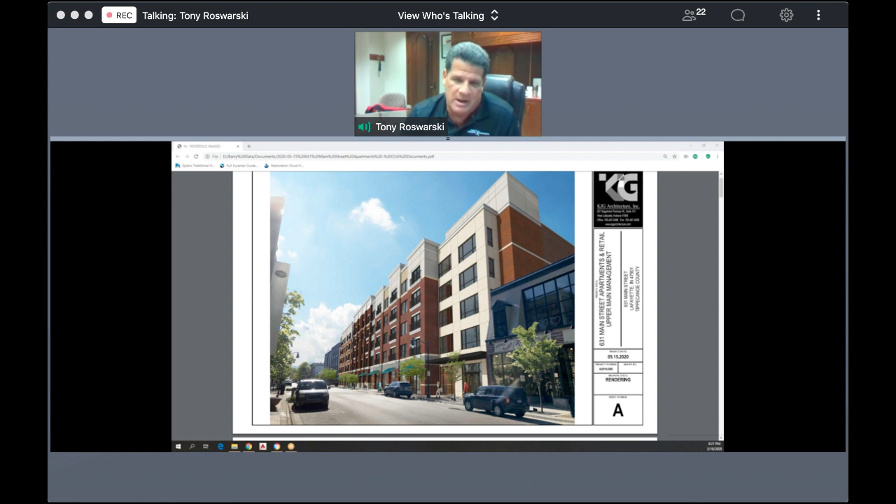Every effort, and at some point you have to be a billionaire, and no bank is going to loan enough money. Some economic factor that we have to be realistic about. There is some economic piece of this at some point. Nobody is going to be able to afford to do it, and no bank is going to loan the money to anybody. There is a piece of that where it becomes unfeasible. You just can't. You're not rich enough.

You don't have enough money to do it. The banks are not going to loan only a certain amount of money. I mean, we cannot just, you're probably getting irritated with it. You just can't wipe that off the table that somehow there is a pot of money that is unlimited and that people are just going to flock here or banks are going to loan it. That's unrealistic. They've tried very, very hard to do the best they can and still keep it within.

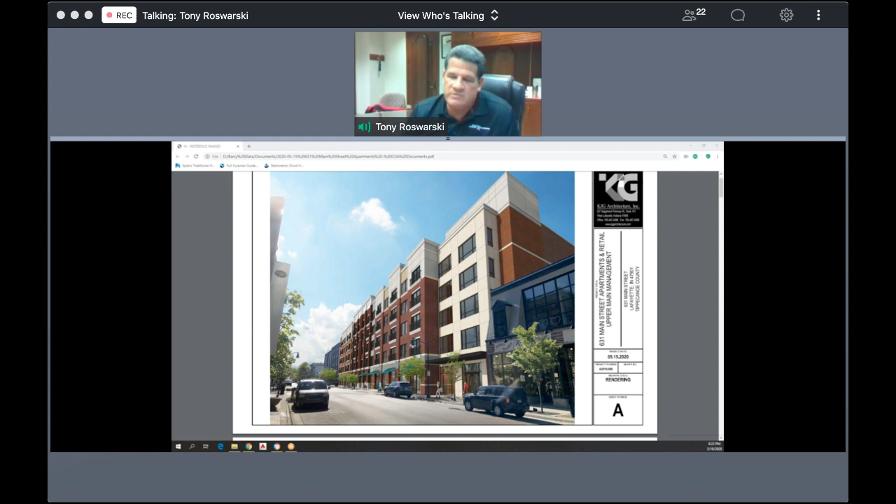It can make it and it can support itself. You can't go bankrupt doing it. And I love our architecture too, but there's been great architecture. Until we started building some of these new buildings, downtown was dead. There was nobody downtown.

Okay, I'll make a motion that we approve the project as submitted with the amendments. And this is Kurt Wall. I will second. Oh, okay.

Very good. Okay, and again, I'll do a roll call and I'll say your name and you can say yes or no, to make it easier. Sean? Aye.

Glenn? Glenn? Can you hear me, Glenn? Glenn, do you have it on mute? I saw him go in and out a little bit earlier. It said joined or unjoined, so I don't know if he's having some trouble. I'm sorry, I'm only getting every other word. I think I'm having problems. I said I...

Approve with the conditions. So that was a yes, Glenn, with conditions, with commitment, or with the amendments, correct? No, it's... Are we just voting on the amendment now? No, we're voting on what's proposed with the changes that we talked about. I'm having difficulty with my connection.

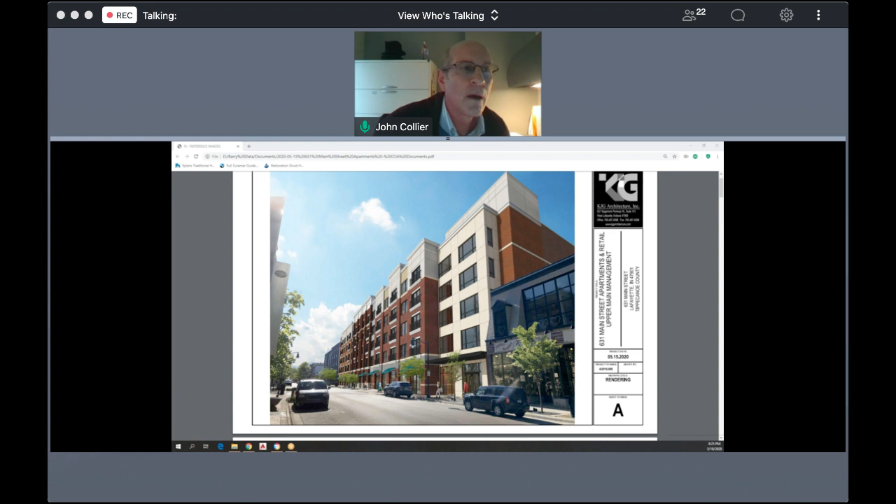So Glenn, can you give a thumbs up or a thumbs down, and we can say with conditions, if we're having trouble with your mic? Glenn's giving a thumbs up. Okay, and with conditions, thumbs up again. Thumbs up again. Okay, thank you. Yes, with conditions, I approve.

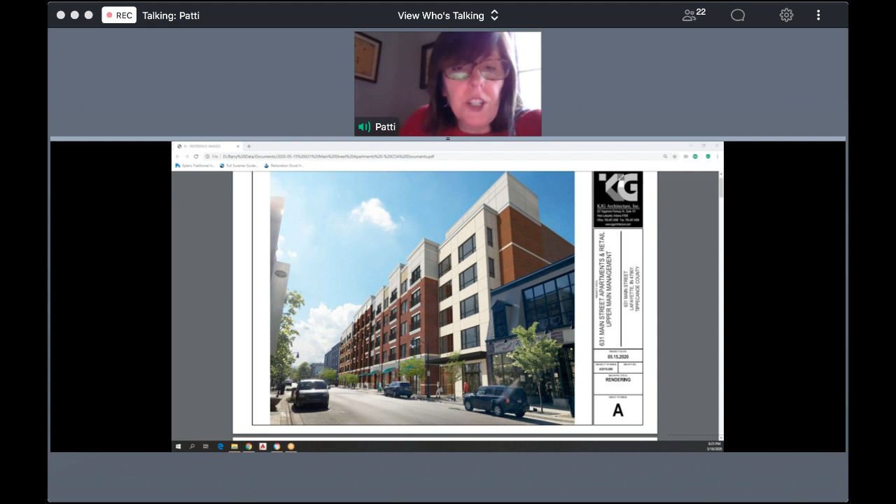Thank you, Glenn. Kevin? Aye. Shauna? I approve with the conditions. Patti? I approve with the conditions. John? Amy? I approve. Great. And Kurt? I approve with the conditions. And I myself also approve with conditions.

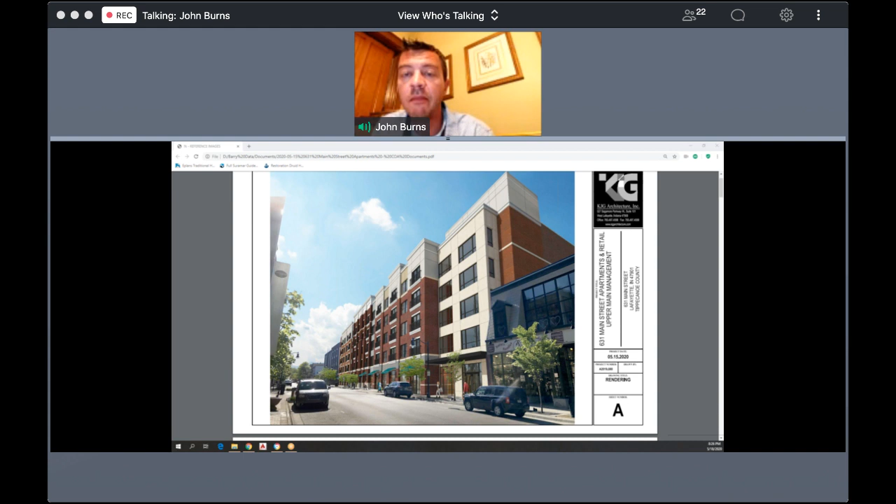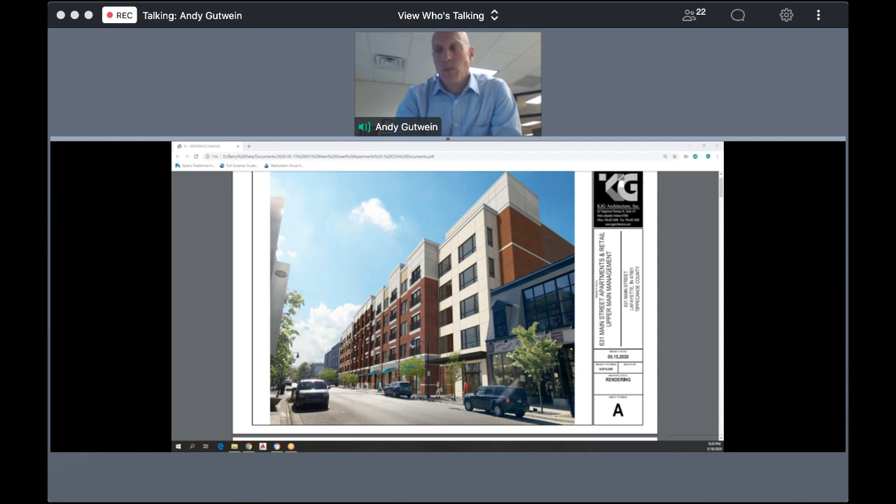Okay, moving on, thank you very much. Yes, thanks. Next under the agenda, under other business, we have staff report. John, do you have anything? I will spare you all any more time and say I have no report tonight. Thank you.

Okay, well I think that takes us to the end of our agenda. Would someone like to make a motion for adjournment? I'll make a motion. Well, Julie, will you? Julie, you can make the motion. Would someone like to second Julie's motion? Before we conclude that, Julie, will you just please confirm for everyone that you were watching the YouTube all the way up until you were able to connect in? Yes, I was watching the YouTube until I could connect.

Okay, so having a second, all those in favor of adjourning? Sean? Aye. Glenn? Glenn? He's gone. Maybe we can come back to Glenn at the end. Julie? Yes, in favor of adjournment. Kevin? Aye. Shauna? I saw Glenn give a thumbs up. Patti? Yes, aye. Amy? Yes. Kurt? Aye. And Glenn did verify, is that right, Michelle? Yes, he's doing a thumbs up right now.